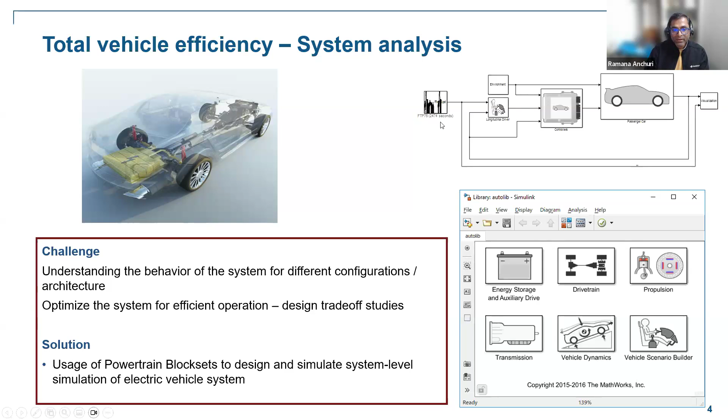To accomplish this, we need model-based design with Simulink. If you're already using Simulink, in some way you're practicing model-based design. For those unfamiliar, model-based design refers to expressing your models through a graphical approach where blocks mimic certain mathematical, logical, and physical behavior. Whatever action you perform on these models, they are ground truth and centric. Say you're designing something - you create these models, expressing executable specifications. The models enable you to specify these executable specifications, and you can test and verify these models, and also generate code from them and deploy to hardware.

Once the models are realized, they're centric to whatever task you do later. On the right hand side you see a simple DC motor built with Simscape Electrical, controlled by a PID controller with a set of references. Once the model is created, you can generate code from the PID controller block and target any microcontroller. So right from requirements to design to code to deployment, Simulink offers a platform to perform all these tasks.

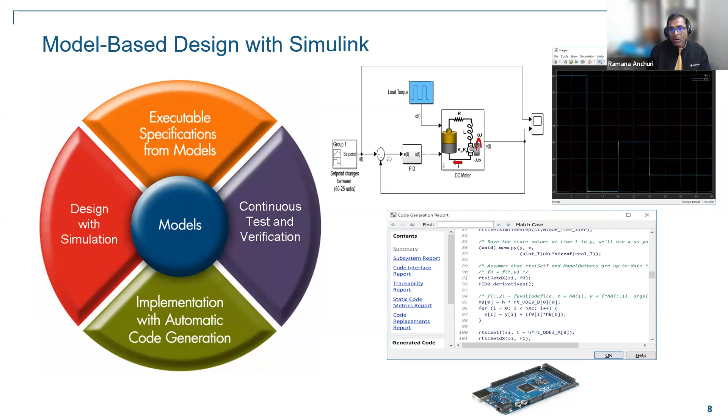Now, there are various ways in which you model these systems. Typically, they are divided into first principles and data driven, in a broad spectrum. In first principles modeling, it's all about the math behind these models and how you express this.

A little lower from first principles is physical networks. This is where you make use of a way that you do in your labs where you play with resistors, capacitors, and inductors. You can play with physical networks in a simulation environment, just like how you do with a breadboard and components.

The other aspect is data-driven modeling. Here we rely on data rather than the math behind the models. You can go with statistical methods, system identification, or neural networks.

Now, whatever modeling approach you want to take up, MATLAB provides various ways or workflows to do this. There are block sets and toolboxes that enable you to go with any of these modeling approaches.

One approach that fits in between first principles and data-driven modeling is the white box, gray box modeling, which is called parameter tuning. Here you can come up with math models or physical networks of your realistic model, and to parameterize the specifications in the blocks, you can perform data-driven modeling to tune those parameters in physical networks or math models.

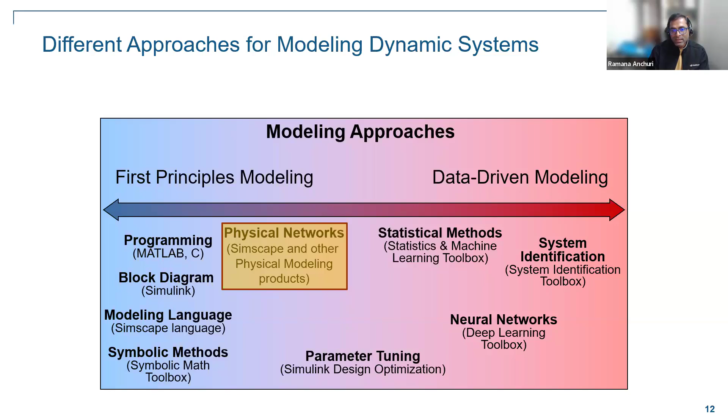Now, physical networks, on the background, do work on certain physics or equations, but you yourself need not express the behavior with mathematical equations. So what I mean is Simscape allows you to model physical networks.

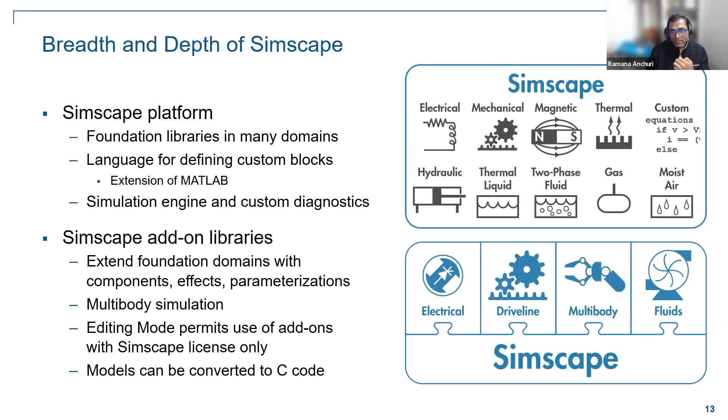For example, if you want to mimic the behavior of a resistor in Simscape Electrical, you can pick the library block resistor and then use it for simulation and analysis.

The other aspect is you can also perform nonlinear behavior. For example, in the previous mathematical modeling, when I asked, can you simulate the temperature effects? It becomes very hard. It's possible, but becomes very hard.

Using Simscape, you can perform multi-domain modeling. I can integrate the thermal behavior to an electrical system and then simulate both electrical behavior and thermal behavior of a system. Likewise, once you realize thermal, the next step is you want to look at cooling the system.

Now you can integrate the thermal liquid or two-phase fluid domain to the electrical and thermal models, and then do a behavioral analysis on when the heat is liberated. You can probably switch on a chiller, which will reduce the amount of temperature your system is generating. So in a way, it's sort of a multi-domain modeling environment, and you need not worry about the math behind this. That is already realized with these blocks, and you can quickly build multi-domain systems.

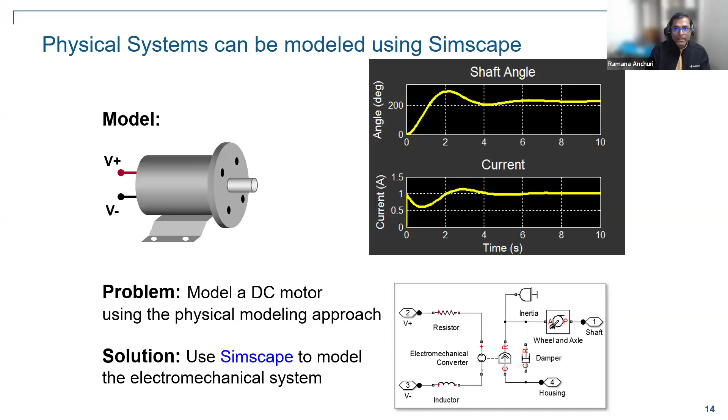So how is this different from mathematical modeling? When you write equations and then quickly hit run, you're actually solving ordinary differential equations. In this environment, you are solving differential algebraic equations. What does that mean? If you look at this loop, you can perform...

Kirchhoff's voltage law (KVL), and you can prove KVL physically in the simulation environment. So all physical laws hold good when you are using Simscape. If you are using a mathematical approach, then it's just equations, and you usually can't do that.

So what this means is when you are in this environment, you can consider current is actually flowing through these lines. In a way, this modeling construct exhibits a behavior that you see when you integrate components in the lab and power them. So you can bring that experience while you are modeling using Simscape.

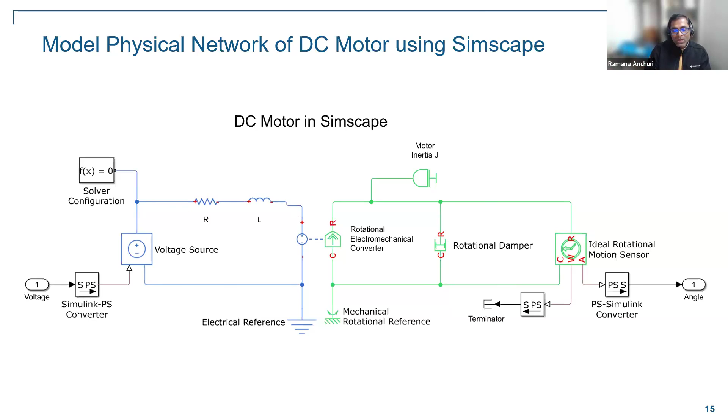Once you do the model of the motors, then it's all about how do you come up with a control mechanism. On that note, Simulink control design and control system toolbox will enable you to tune this PID controller pretty easily. You can start with a trial and error method and then see the response of the motor. But there is a quicker way where you can auto-tune the PID gains pretty easily with a single click of a button and realize the controller.

There are various ways to tune this. We will look at one of the most difficult methods to tune a PID controller for a non-linear plant. If your plant is linear, you double click the PID controller, click on hit tune, and it will give you the tuned gains just like that. But if the plant is non-linear, then we need to go through a data-driven modeling approach per plant and then apply the PID tuning to it. We'll look into that when we get to the power electronics converter tuning.

So let's look at the brushless DC motor. Previously, we have seen the simple DC motor, but this is a special purpose DC motor you can consider with permanent magnets. And you need to fire the windings of this particular converter appropriately by knowing the rotor position at every given point in time so that the action keeps going.

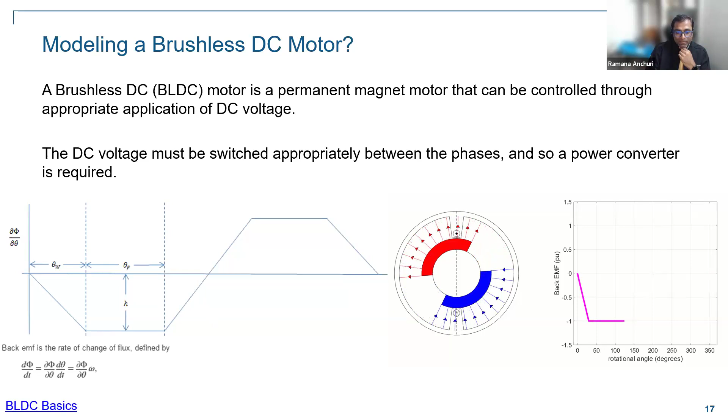So the thing with a BLDC motor is it always needs this front-end inverter. Why so? Because when you have a permanent magnet which is rotating, you need to fire these three-phase windings appropriately so that either attraction or repulsion happens and the motor keeps on rotating. But to do this, we should always know where the rotor is at a given point in time. So here, the power electronic converters are being switched so that you see three-phase currents getting into these windings, wherein the reaction happens and the motor rotates.

It's very important that the motor always has a front-end inverter, and you need to develop a logic so that these are fired. Now, when you're firing this power converter, you're not controlling the speed, you're only making the motor rotate. Nothing much you are doing. When it comes to speed control or torque control, then you have to employ control techniques on top of this behavior. So in a nutshell, if you want to make a BLDC motor rotate by giving power, you definitely need a front-end inverter.

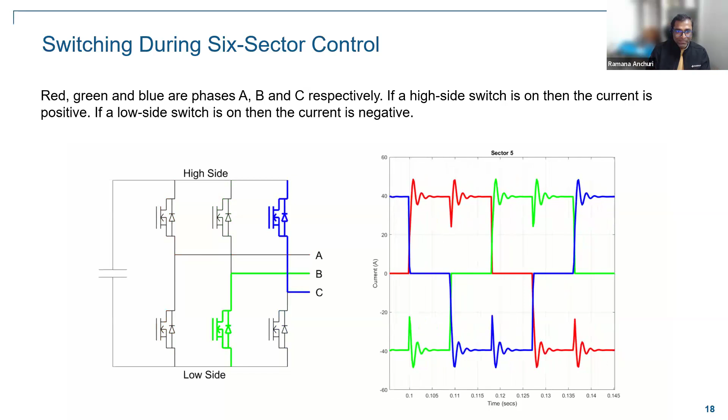So to perform speed control of a BLDC motor, again there are so many examples that we created. We highly recommend, if you're starting up with understanding these controls for BLDC, PMSM, or induction motors, that you have a look into basic examples around these motor controls. One such example is this.

As you could see, the blue colored blocks are electrical systems. I have a fixed DC voltage that I'm passing through an average buck converter, which enables me to get a variable DC at the DC bus here. This inverter is nothing but that front-end inverter I spoke of previously, which enables the commutation logic for this motor. So we have two controls here: one is this particular inverter making sure the motor rotates, and this buck converter is actually generating a variable DC so that the speed of the motor can be controlled.

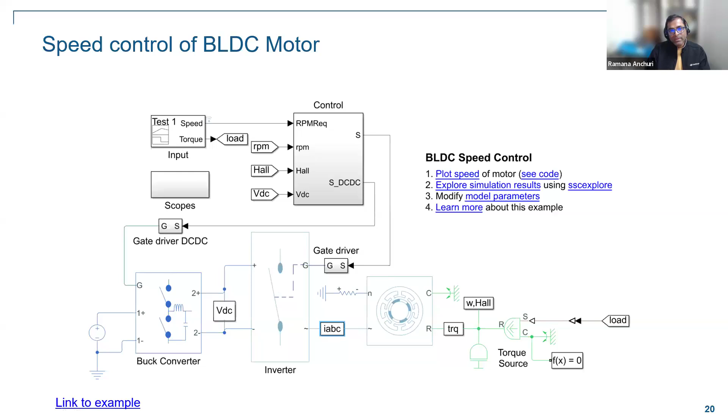Now if you look at the mechanical side of it, there is a mechanical reference connected to this, and we have defined the rotor inertia, and there is a sensor. There is a torque source wherein you can apply input to torque input, and that torque input is nothing but you loading the motor. So that loading torque is generated by this particular test signal. Here you're specifying the speed reference and also loading the motor. So all in all, this particular example will make you understand how to control speed of a BLDC motor, just the speed.

Now if you look at the control techniques, you don't just use voltage to control, because in scalar control you can't get better torque performance, and you can't precisely control the motor speed, etc. That's why you resort to the most popular control architecture, which is field-oriented control.

So in this case, this is a physical system wherein you have power supply, the converters, inverters, and the motor. You have the current loop, an inner current loop that works at a higher sample rate, and then there is the outer speed loop, which is a little slower compared to the current loop. So in this case our idea is to generate three-phase currents and enable this inverter working.

What's more important is you convert these three phases to Id and Iq, which are direct and quadrature axis currents. Each of these currents decouple the speed and the torque. That means you can use one reference current for controlling speed without affecting the torque, and one reference current you can control torque without affecting the motor speed.

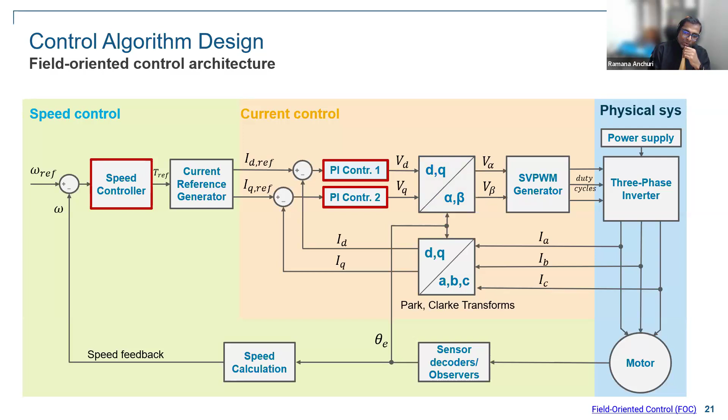So PI controllers are needed, yes, and you can also tune these gains of the PI controllers pretty easily through Simulink control design workflows. So all in all, irrespective of whatever the type of motor here, be it a BLDC, PMSM, or induction motor, this control architecture will work. The only thing you need to take extra caution with when using BLDC motors is the front-end inverter is needed to keep the action going.

So this is one case. This is a four-phase PMSM motor, and there are five-phase and three-phase PMSM motors also that you can use. But this example refers to the four-phase PMSM motor, and you have a converter, torque and load references, which you can define through a mat file or by just drawing through mouse.

And here you see the PMSM parameters. The one thing I often get asked is how can we parameterize this? How do I know LD, LQ, RS of my PMSM motor? One quickest way is the manufacturer of the motor will give you the data sheet, and the data sheet provides all these values. If not, there is a way to estimate the parameters of the motor by running a simple test on it.

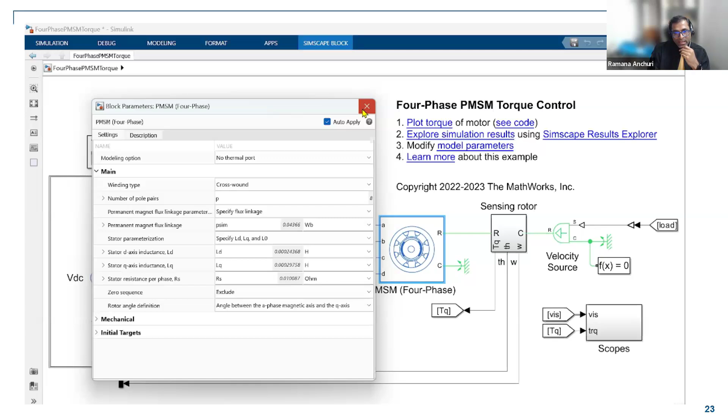If you are interested in parameter estimation, please look into certain examples where you can directly use Texas Instrument boards that are integrated to PMSM motors, and you can perform a quick estimate motor parameters exercise, which will give you all these values. Then, as I mentioned, we need to have a rotor sensor, and what you need to do is hit run, and the model compiles and gives you the results.

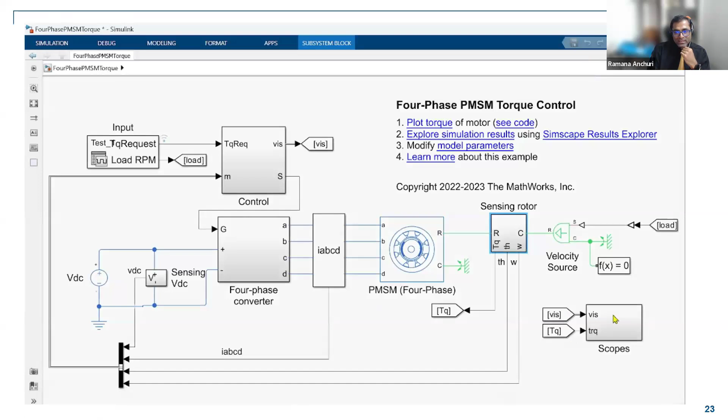If you look at the scope here, I am trying to see what is the speed of the motor and what's the torque reference and torque measured. Now, in the initial phase, I'm keeping the speed constant and varying the load. And if you see, my motor is able to generate the torque that I wanted, and the torque reference and the actual torque are the same.

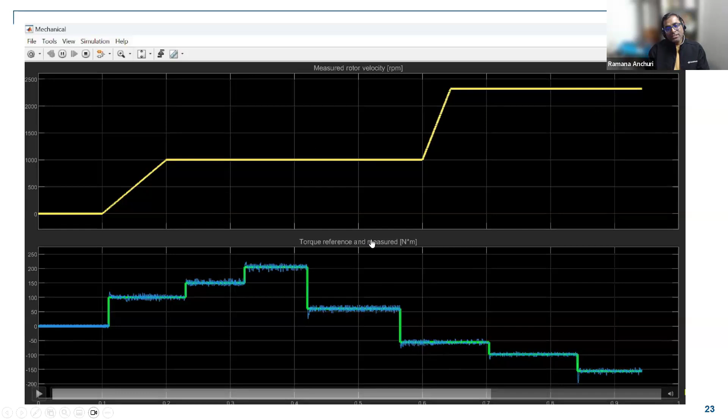Now, later in time, I'm varying the speed, and even at a different speed, when I change the load, it is able to follow the reference torque. So this proves the control technique is working fine. You are making these reference changes, but when the load is changing, you are able to maintain the constant speed at different speeds. So how is this done?

It is done through the C2000 microcontroller block set. We very recently released the C2000 microcontroller block set, where C2000 boards come from Texas Instruments, and you can design the motor control algorithms using Simulink, simulate the behavior, and then later implement this code onto the hardware with a single click of a button.

And you can deploy these models standalone and run the motors. Once it is deployed, you can just disconnect the motor USB port and run the motor standalone. It will not have anything to do with MATLAB and Simulink later.

So in this aspect, what we typically need to do is first calibrate the sensors, because sensors might have some noise, and initially we never know where the rotor position is. If needed, you can estimate motor parameters if you do not have an idea of what they are, or use data sheets if available. You can model motors and inverters, design the control algorithm, and then deploy. So the motor control block set will enable you to do all these steps from within the Simulink environment.

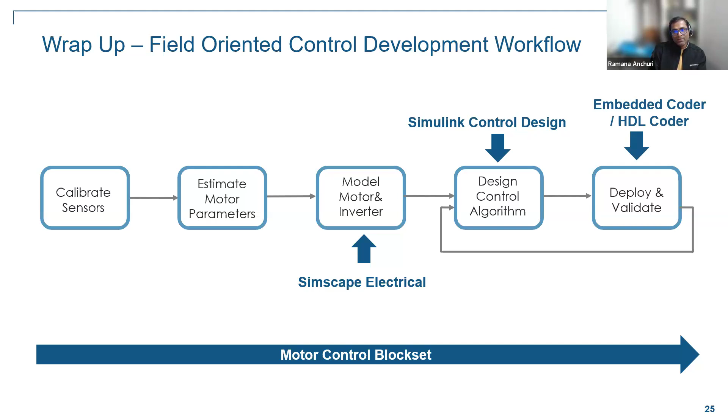So how does it work? Once you configure your model for hardware, as you could see, the hardware board here is TI Delfino F28379D. This is a very popular and latest board. We do see this launchpad in many universities too. The build, deploy, and start will enable you to generate code out of the model directly, C or C++ code, and it will invoke Code Composer Studio in the background, generate the bit file, and deploy it onto the hardware. It's just one click where you can translate this model to run on the hardware.

You need not struggle or put effort into understanding the code. Anything that you want to modify with respect to your algorithm, you can do it at a model level. The rest of the things are taken care of.

Not just Texas Instruments, but if you're targeting a different microcontroller like Microchip, NXP, STM, or Infineon, there are support packages for each of these hardware boards, which you can install for free and use Simulink to model the algorithm and deploy it onto the hardware.

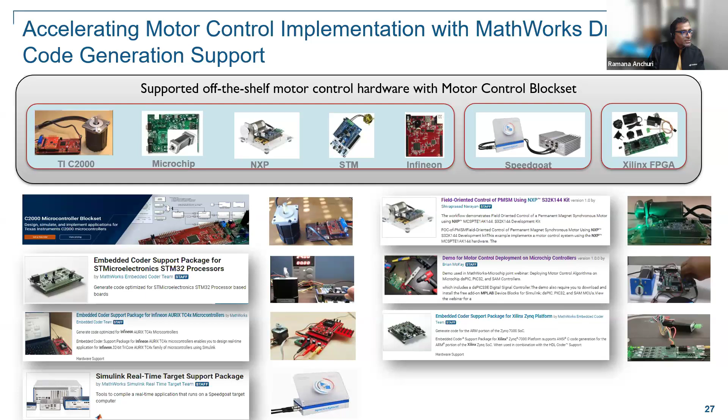So can you explain about the C2000 model? What is that? Can you repeat the question once again? So what is that C2000? Okay, so C2000 is nothing but a family of microcontrollers offered by Texas Instruments.

Texas Instruments is the semiconductor company that manufactures chips and launch pads, and these chips usually go into real world products. What you see on the top left, red color launch pad and a PMSM motor, the launch pad is F28379D, which is from the C2000 family of microcontrollers.

So we can save the code inside of this chip. Come again, sir? Can we save the code inside the chip? Yes, so previously I did mention here. Let me just go back.

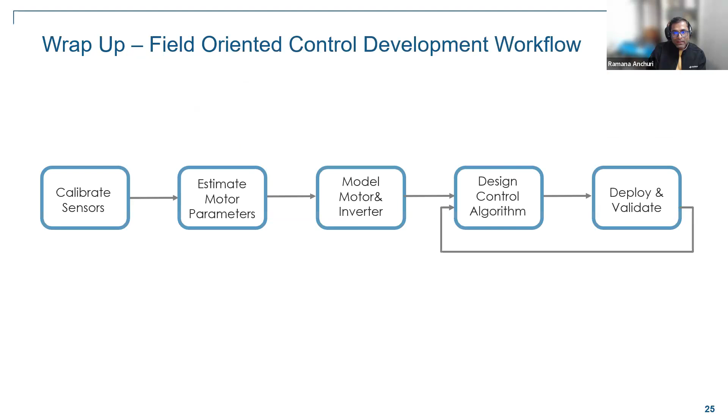Does it require any additional type of software installed for MATLAB? You need to install Code Composer Studio from Texas Instruments, they will provide you. Okay, thank you sir, it's a compiler. It's a compiler, and you need that.

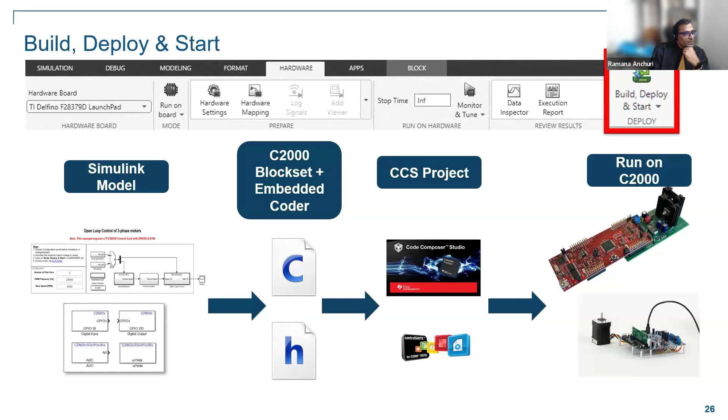Let's move to the power converter part. Power converters are basically needed because your load requirements could be different at different points in time, and sometimes your input is AC and you want DC, or your input is DC and you want AC, or your input is unregulated in case of solar panels, and you need a device that looks at the load requirements and then sends the power accordingly, be it in AC or DC form.

So what it needs is a sensor that always observes the power voltage and current going to the load, and then with respect to the user set references, you generate certain pulses and control this power converter. At times this converter could be pretty complex in nature, not just one switch, multiple switches, and you will have components like inductors, capacitors, resistors, etc. So why is this important?

If you look at some high-end cars, one use case, an automotive use case where there's a very high performance power converter needed, is this one. This is a Mercedes-Benz E-Class car.

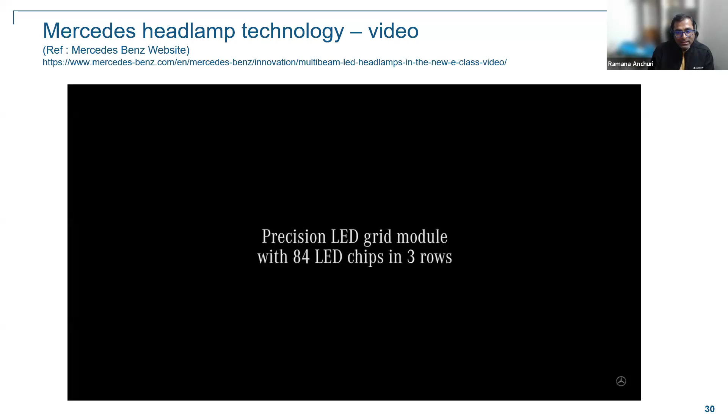So this particular one has an adaptive headlamp technology, wherein these LED strips are lit adaptively based on what the car camera is seeing. So what it means is the opposite vehicles will receive less glare, and at the same time you'll have better visibility of the road. You can also control which LEDs need to be lit so that the glare is minimum and your visibility is not lost. To perform something like this, we need a high performance power converter that can power these LEDs adaptively based on some sensor information.

So what it takes to build a technology like this - again, this is from Texas Instruments, called the Texas Instruments DC-DC LED kit. What it has here is an LED strip integrated through drivers, connected to a power converter. This is a DC-DC power converter, famously called SEPIC. On the right-hand side, the block diagram shows this is basically a single-ended primary inductor converter. This is the primary inductor at the source end, responsible for boosting the voltages.

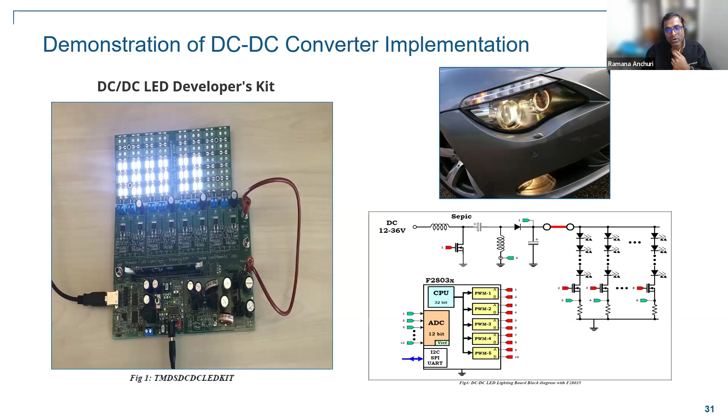Now, I did mention when introducing Simscape, you can consider this blue color lines as electrical connections. You can apply KCL at this node, and all the values you compute will conform to Kirchhoff's current law. That means whatever you are doing on the breadboard is equivalent to doing it on Simscape.

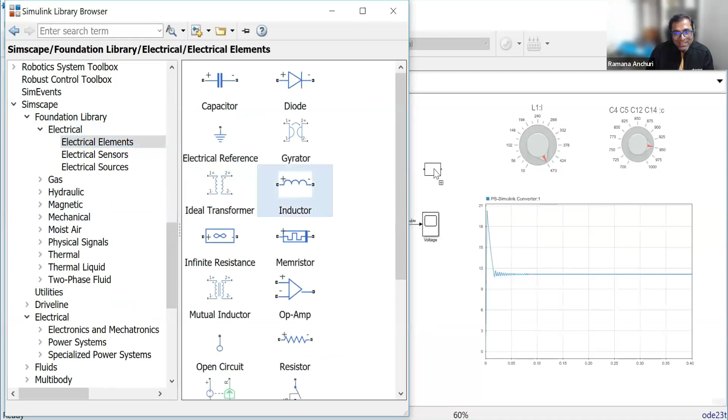So what Simulink offers is not just modeling, but you can execute this model and see the response. If you're wondering where I pick these models, you can use Simscape to model electrical systems - just go to Simscape electrical elements, drag and drop this onto the Simulink canvas, and double click to parameterize this block. The Simscape block itself gives you more information - it's not just inductance you specify, there's series resistance and parallel conductance.

What does this mean? You can model a realistic behavior of this inductance. And if a particular current is flowing and you want this inductor to behave like a saturated inductor, you can also change to that. So that means you can emulate the behavior pretty close to what you see in the lab.

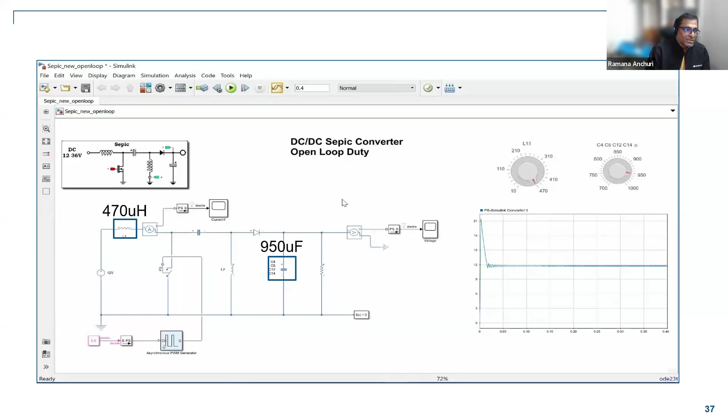Now here we'll look into the modeling constructs. What we have here is a 470 microhenry inductor, and the load capacitance is 950 microfarad. These two basically impact this converter pretty much. If you go wrong in picking the right value, whatever is happening on the source end will go wrong too. These values are from the datasheet, but typically when developing your own converter, you never know what value of inductor and capacitor to pick. So we'll look into how we can optimize the values of capacitors and inductors of a power converter.

But right now I just have a 50% duty cycle. I just used the datasheet parameters and was able to simulate the model. Here, LEDs are replaced by a resistor. In the previous case, you got some overshoot initially, but the voltage stabilized without much ripple. This is the response I got directly using the datasheet parameters.

Typically, if you're designing your own converter, you never know the values, and trial and error methods will be very effort intensive. You can't do that with physical capacitors and inductors. So one way of doing that is through simulations. Here, instead of using datasheet parameters, let's change the inductance to 10 microhenry instead of 470, and do the simulation.

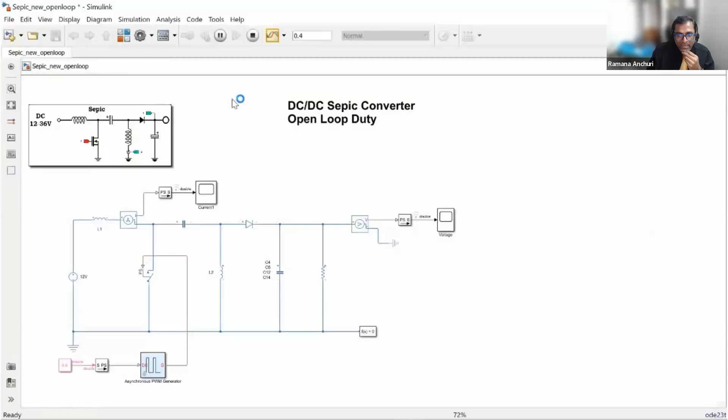Now when you do this, I am not receiving any ripple in the output voltage, which is good. But if you look at the input current and zoom in on it, the behavior is not what I'd like to see. Ideally I need a continuous current, but this current is going below zero and negative for a certain amount of time. That means this converter is operating in discontinuous conduction mode. We usually teach students these aspects: continuous conduction mode and discontinuous conduction mode.

Changing simulation parameters, you can explain these phenomena pretty easily using SimScape. Now, the problem with discontinuous conduction mode is if it's LEDs, they might flicker. If you're using this converter to run a motor, there will be torque ripple and noise generated. You're also polluting the input side, so the power factor will reduce, and you end up using more current for a particular performance. So this is not desirable. Although the output voltage is ripple free, the input current became discontinuous.

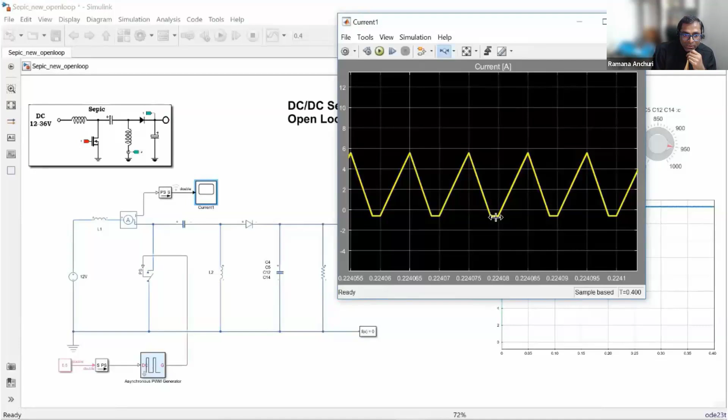So picking the right values for inductors and capacitors is crucial. Simulations will enable you to do that analysis very quickly and arrive at optimal values. We used simulations to design the parameter values for these components, giving you a scope to optimize component sizing through the analysis. Typically, people end up designing their own inductors and rely on capacitors available in the market. Through simulations, your effort reduces because you can easily compute what value of inductance will be sufficient. More inductance can be used, but your PCB becomes bulky because you end up having more turns, more weight for the inductor, more space, and so on. So you can optimize component sizing using simulations.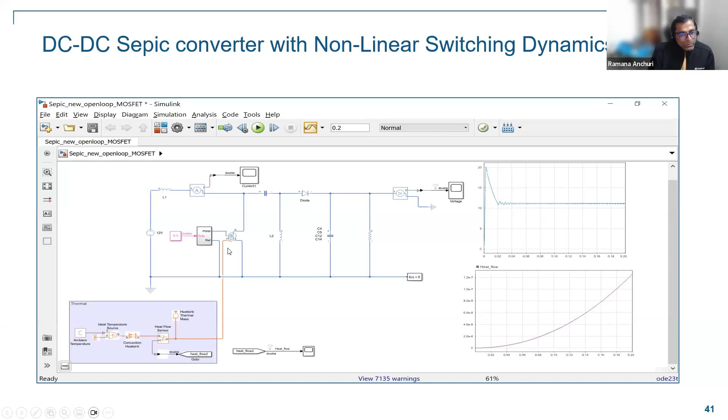The next part is nonlinear switching behavior, which is also very crucial. In the previous case, I used an ideal switch, but in the real world, no switch is ideal. So I replaced the ideal switch with a MOSFET here in this converter, and you do see some differences here.

On the switch itself, one of the inputs is the PWM pulses, and you have the drain and source connected to the electrical wire. But there's also this orange, or rather gold color lines, which are for modeling the thermal behavior of the power electronic switch.

Why this is important is we often tend to go at high switching frequencies because you can easily filter out high frequency ripple. But the problem in doing so is the switch generates a lot of heat, and this heat needs to be regulated through heat sinks or forced cooling, etc. Now, to determine the cooling requirement, you need to model that thermal behavior here, and that's what we did. You can right click on any power electronic switch.

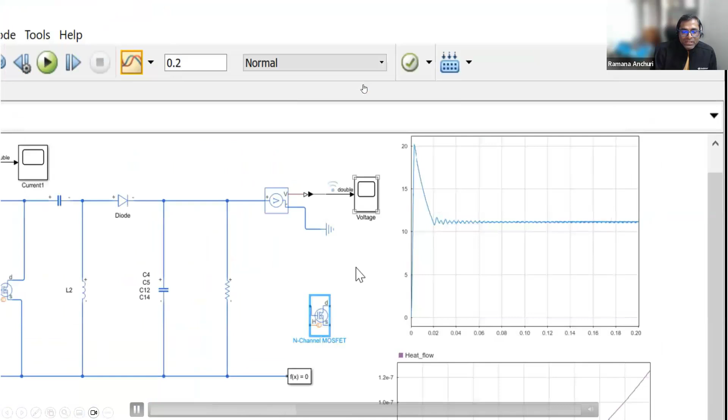And then in Simscape block choices, you can select threshold based thermal. Now you see a thermal port, which is H, that is appearing. Using Simscape thermal, you can build the thermal behavior of this.

Okay, so I'll spend some time on this to make you understand. When the switch is operating at a certain switching frequency, it generates certain heat, and that heat information is available at this port.

Typically, as a user, you will express at what temperature your power converter is operating, which is nothing but the ambient temperature. Heat flows from a point which has more temperature to a point which has less temperature. If this switch is generating more heat, then the heat goes from node H to the ambient through a medium.

Now, when the heat flow is happening towards the ambient, there will be some loss of heat while the flow is happening. That is modeled by a thermal mass heat sink. This exhibits a behavior where it sucks out some heat that is going from this H port to the ambient, just like how voltage drops when it goes through a resistance. The heat is lost through this thermal mass, and we have a sensor that measures the heat flow.

And how this heat escapes to the ambient is the convection heat transfer. So we do teach students about this heat sink design where the junction temperature is at high temperatures, and then it goes from case to heat sink to ambient. Now you can model that entire behavior using Simscape thermal.

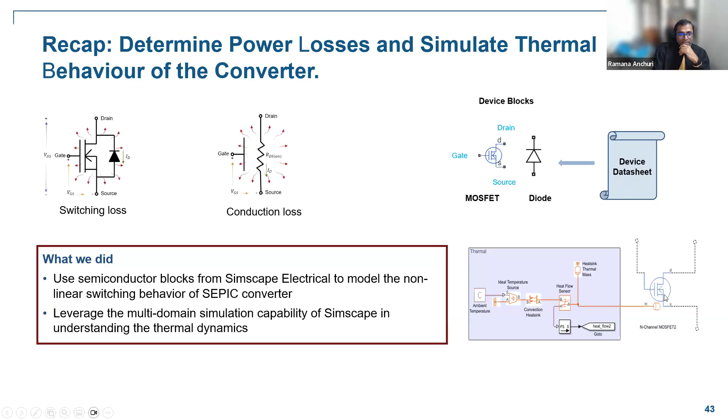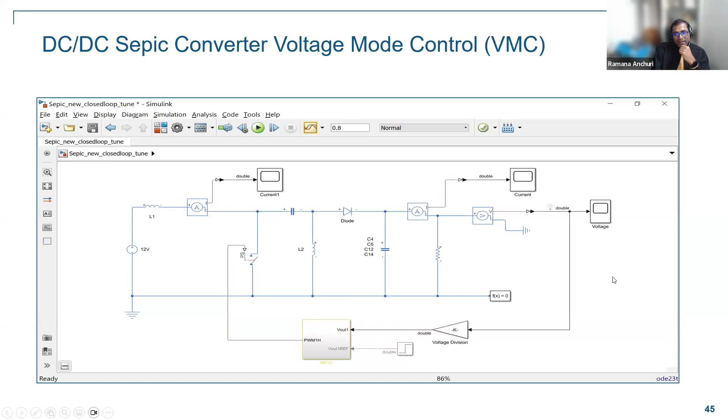And typically this is the block where we can generate code and deploy it onto hardware, and that software will control the actual power converter. So what you can do is set the references first. Here I'm setting it below 0.4 seconds.

I want the output voltage of the converter to be 12 volts, and after 0.4 seconds it needs to be 27 volts. That is the reference set by the user. Once this is set, then you can run the simulation.

Here I did not tune the PI controller at all, it's just blank, default values. But now below 0.4 seconds it needs to be 12 volts, and after 0.4 seconds it should be 27 volt. That means this controller is not working at all.

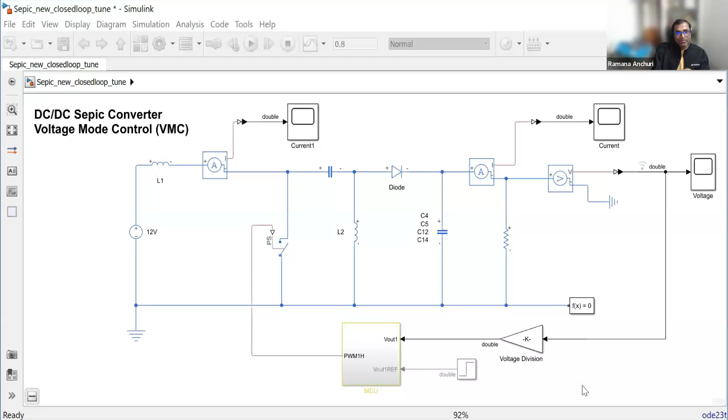Now what we need is to design the controller gains properly so that the reference and actual are the same. To do that, we can go to the PI controller block, double click on it, and then hit the tune button. By default, the proportional gain and integral gain are 1 and 1.

When you hit tune, what happens in the background is it tries to linearize the plant. I did mention at the DC motor end, if your plant is a linear plant, the PID controller block will directly give you the gains. But if it is a non-linear plant, then you need to go through a different methodology to tune the PI controller. So the flag it shows is plant cannot be linearized, and it asks us to identify a new plant using data-driven methodology.

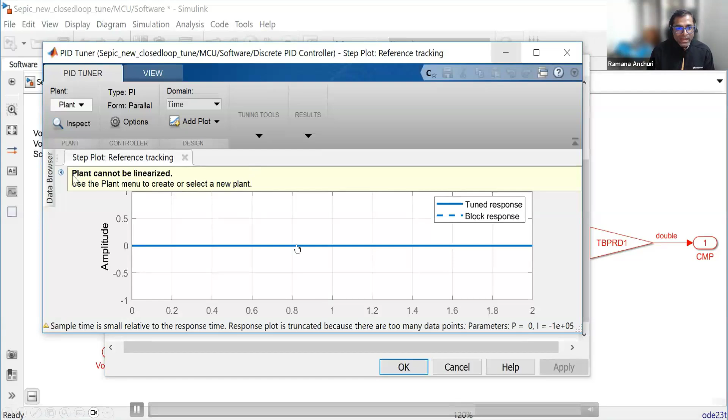So I am going to walk you through a process on how to rely on data-driven modeling to auto-tune the PI controller. To do that, you need to go to plant, and then click on identify new plant.

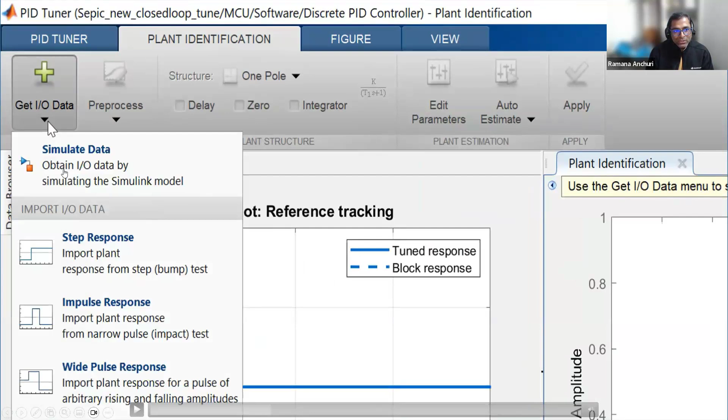On the right hand side, you do see a new tab appearing, which is plant identification, and it is asking us to use the get IO data menu to identify the new model. So you need to go to get IO data and click on simulate data. You can set the offsets. I will let you know what these offsets and amplitudes mean.

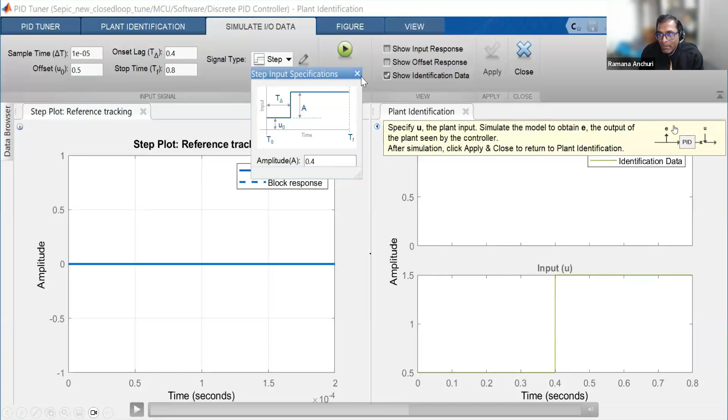That means we are not using the PID controller at all. Instead, we disconnected it and we are just sending a step input as U and then computing the error, which is nothing but this particular graphic.

Here I am doing 50% duty cycle to 90% duty cycle, that means this U is nothing but the step input. With respect to this step input, I am computing the error, which is going as input to the PID controller. In this process, please make a note, PID controller is not doing anything. We disconnected it. We are just sending a duty cycle, which is nothing but this step input, and we are computing what is the error. So here in this case, we are using U as an input, E as an output.

That means using this input and output data, I can identify a new plant model using a data-driven approach. That is what is happening. Instead of using the same plant model which is on Simscape, I am relying on data generated by the Simscape model. Here in this case, step input is the input and output is the error that otherwise will go through the PID controller.

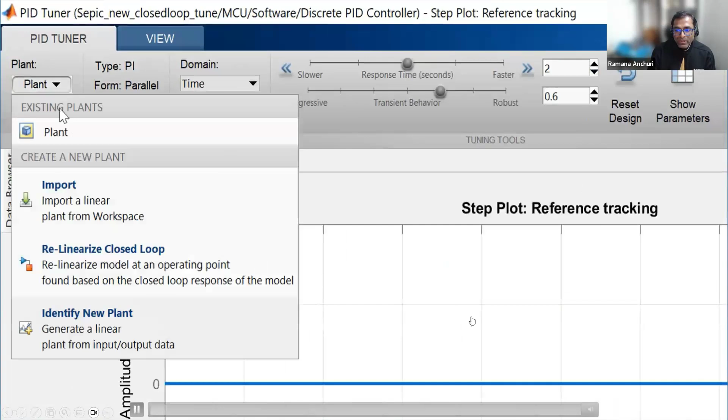Once you do this, you can apply and then close. Now here...

As the label indicates here, my identification data, that means the response of the data-driven model, is the green color response. The plant I identified using the data is the blue color response. Now, definitely there is so much gap between what I identified and what the data is providing me. So you can use this adjuster and then reduce the gap. The other thing I can see here is the transient response of the model is not being captured properly.

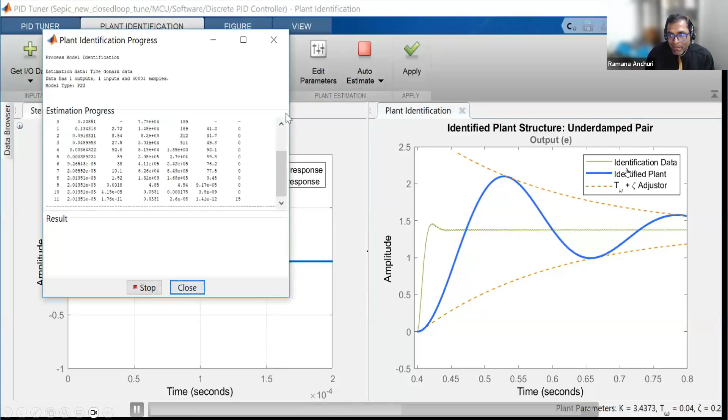That is because the structure used to identify a plant model is only one pole. If you give more flexibility to the plant model, here we are applying an underdamped pair of poles so I can place these poles properly to map the identified plant to the identification data. But when I changed the underdamped pair of poles, I did not place them properly so that the response is in line with the identification data. In that case, I can resort to clicking auto estimate. When I click auto estimate, it will place the poles properly at certain locations and map the identified plant to the identification data.

Now you see my identification data and the identified plant are correctly mapped. What this means is you generated data from a Simulink model and created a plant that exactly behaves like what you generated with the model. Now I use this identified plant instead of the Simulink model to tune the gains of the PID controller. So instead of directly working on the nonlinear plant, which is the power converter, I am generating data from the power converter and using that data to identify a new plant transfer function.

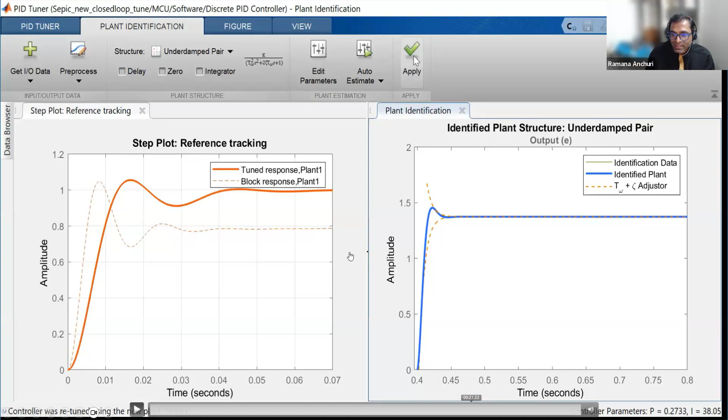Once you do that, you click on apply. Now this plant is used to tune the controller. Now you get the response of the PID controller. You can also see at the bottom the proportional gain is 0.2733 and integral gain is 38.05. Now, once this is done, you can see what parameters the block previously had, which is 1 and 1, and what parameters it has after tuning. You can also see all the performance and robustness parameters like rise time, settling time, overshoot, gain margin, phase margin, etc. This gives you more confidence about whether your system is closed loop stable.

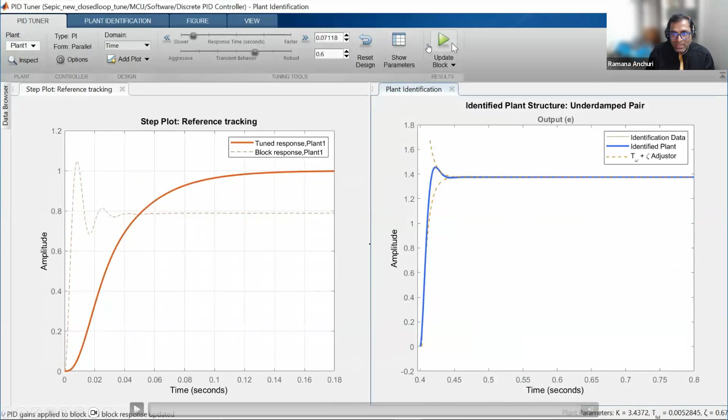Once these gains are computed, you can use these sliders to make the response faster or slower, more aggressive or more robust. Once that's done, click on update block. The values you saw in the previous process will get updated on the block parameter. Once this is done, you can click OK and run the model.

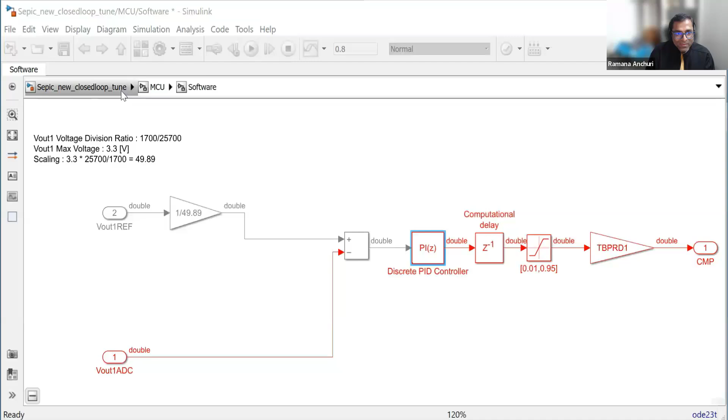Now you see the response of the system. If you remember, I set the reference as 12 volts before 0.4 seconds and 27 volts after 0.4 seconds. Now I can see the output voltage of the converter is actually following the reference voltage. So this is how you can tune control algorithms for nonlinear plants.

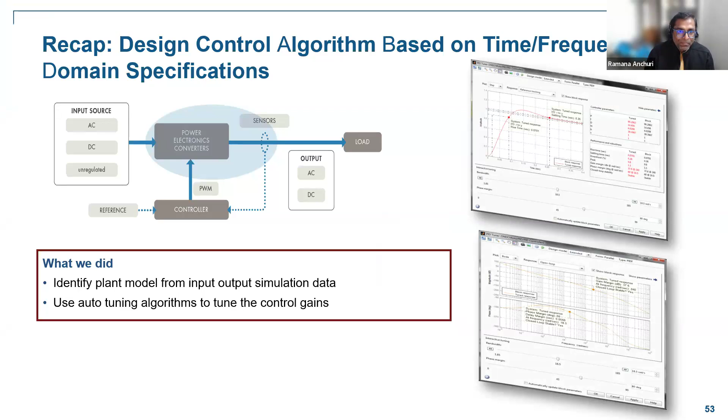So you can use this analysis, simulate input and output data, and then auto tune the control algorithm. Now the next and final part is how do you deploy this algorithm onto hardware? Because we can't just stop with simulations.

What MATLAB Simulink offers you is the ability to translate the control algorithm to either C or C++ if you are targeting microcontrollers or DSPs, or VHDL or Verilog code if you are targeting FPGAs or application-specific integrated circuits. Whatever it is, the model is the same, and you can generate code to target any of these boards.

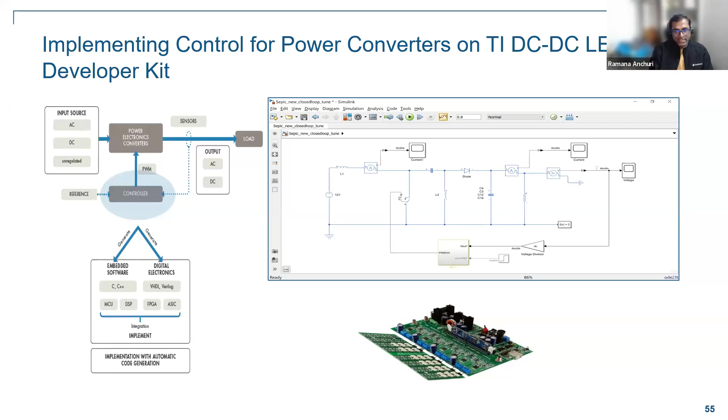Right now our target is the Texas Instruments DC-DC LED kit. You can take the microcontroller subsystem itself and have the interfaces ADC and PWM. These will come from the microcontroller block set, the C2000 block set, and these interfaces will enable you to communicate with the hardware from within Simulink. You need not write any device drivers for Simulink to communicate with the hardware.

Once this is done, one interesting way of verifying whether this control algorithm is working on the hardware is to run the simulations in external mode. What this means is, I have a PI controller subsystem here, and with all the interfaces that are needed, I can run the simulation from within Simulink and also deploy the code on the hardware, and read back the signals into simulation to verify, based on my references, whether the output voltages are changing and whether the particular LED strip is lit or not. All that analysis and verification can be done from within the Simulink environment itself. So here Simulink is communicating with the board, and we are reading back the values that are written on the board. This is what we call external mode simulation, and you can run it in tandem.

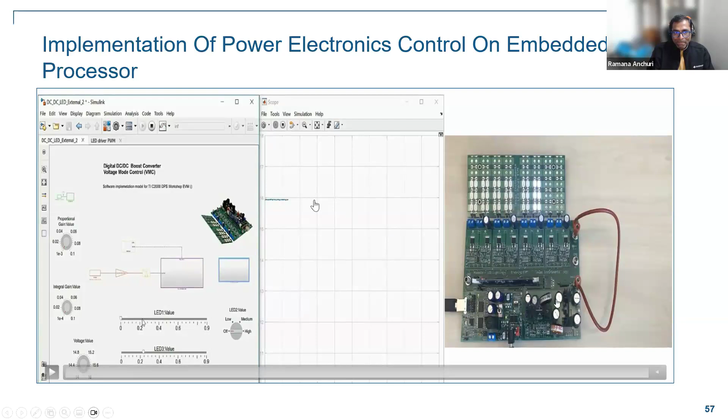In a nutshell, it's not just tuning the controllers — you can generate C or C++ code and deploy it onto the hardware. There are various ways to verify the code as well as the algorithm, and later you can generate optimized code. This is production quality code — please don't mistake it for Gen AI generated code. This is production quality code that can go into real world applications.

That's it from my end for today. I am open for any questions you might have.

One question — why did you give the 0.4 value to U for the plant model to convert it to linear? You converted the nonlinear plant into a linear one for tuning the PID, and gave an amplitude value of 0.4. Why 0.4?

So the thing is, we changed the duty cycle of that particular system to generate the error. I needed to generate data so that when the duty cycle changes, we see what happens to the output voltage. So I set an offset of 0.5, and then used an amplitude of 0.4. What happens is the duty cycle starts at 50%, since the offset is 0.5, and then 0.5 plus 0.4 becomes 0.9. That means I'm changing the duty cycle from 50% to 90% while capturing data to identify a new plant model. So I just set the offset and amplitude while doing that.

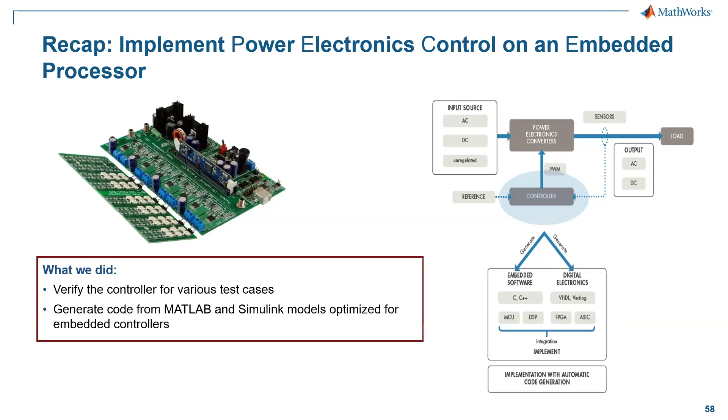Any other questions from the participants, please? I think there is no other query, sir. So thank you very much, sir, for delivering such an insightful and enriching session, and for taking valuable time out of your busy schedule. No problem at all.

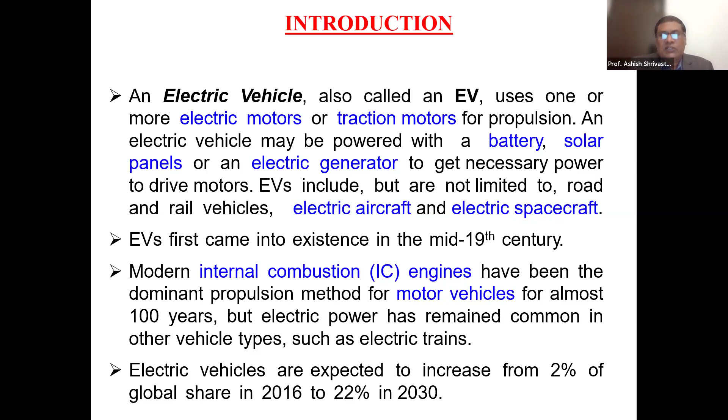Electric vehicle, as per our Honorable Minister of Transport, Mr. Nitin Gadkari, he has set a target for the Indian context that almost 30% of vehicles on road would be electric vehicles. That is the target which has been set, but we are somewhere close to 5% only. So we are way behind the target which has been set. I am telling you the current scenario, which is close to 3 to 4% in the market as of now.

What are electric vehicles? It is known as the green vehicle because it does not give any pollution to the environment. It does not have any internal combustion engine.

All the power provided in the electric vehicle is through the motor, and then through the gear system the power has been generated. The motor has to play the key role, and along with the motor, there is a lot of power electronics also involved.

You need a DC-DC converter because charging has to be done for the battery, which needs DC supply. But the charging gun you plug into the socket is AC powered, so AC power has to be converted into DC. So then we need an AC to DC converter, and then we need a DC to DC converter.

Why do we need a DC to DC converter? Because every charger works on two modes: CC mode and CV mode, that is constant current and constant voltage. Initially it should go into constant current, so the battery should be charged for the initial 70% on constant current. Then it has to switch from constant current to constant voltage, and the battery management system plays an important role while shifting between the two.

So that's why the DC-DC converter plays an important role. A constant current driver has to be made so that constant current is supplied, with the basic purpose of achieving fast charging. Reason being, batteries are rated in ampere hours. More ampere you give, the faster you can charge. So the ampere hour requirement has to be fulfilled.

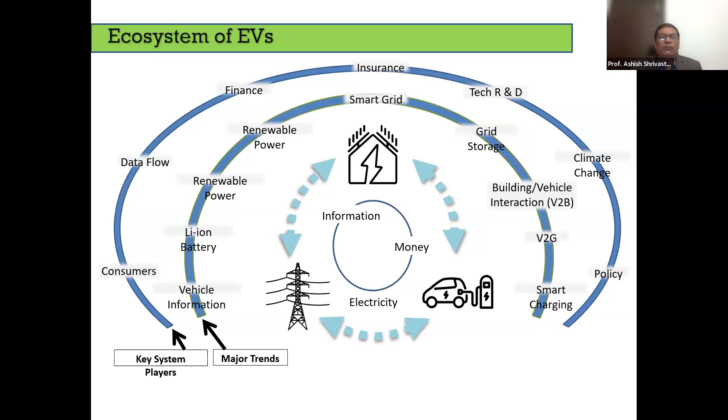Similarly, the government is making policy so that at late night, rates will be low, so that most people can conveniently come at night time for charging their vehicle at commercial charging infrastructure. So this is the overall ecosystem where a lot of data, money, and concepts will be flowing from one part to another.

Looking at the history of electric vehicles, in the 19th century, in 1837, the first electric car was invented in Aberdeen, Scotland, by Robert Davidson. Later, in 1841, he built a larger electric train car. Then 40 years later, around 1884, inventor Thomas Parker created the first electric automobile in London.

Then in 1890, almost 50 years later, the first electric car was produced in Iowa, USA by William Morrison. The car was considered an electrified wagon, which could carry up to 6 passengers, but with a maximum speed of 14 miles per hour.

So that means somewhere around the 19th century, this idea was explored but could not survive because the design, the battery, the motor, they were not able to really fulfill the requirement that the IC engine could. That's why for almost 100 years the IC engine has had a monopoly in the automobile industry. But now electric vehicles are coming forward.

Similarly for electric vehicles, the batteries also have their own history of inventions. First, the non-chargeable battery was developed in 1830, which was purely the lead acid battery. Then the chargeable battery came after that, in 1859. Then the deployment of electric powered trams, these batteries were deployed in 1890. And then in 1990, the lithium ion battery came, which has revolutionized research in electric vehicles, because 50% of the cost of the vehicle is basically the battery itself.

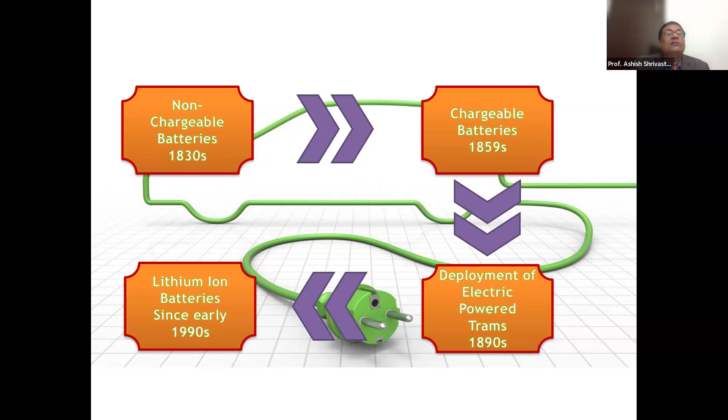Secondly, during the rainy season, you might have seen in many parts of India the underpass areas are fully waterlogged - Gurgaon's story everyone knows. In the rainy season, there's more than 2 feet, 3 feet of waterlogging on the road itself. With electric vehicles, people are skeptical whether they can go through an underpass that is completely waterlogged or not. If any drop of water enters the battery terminals, although they are quite well designed and well packed, if water droplets reach the positive and negative terminals of the battery, they will simply short circuit it, and then you cannot move even 1 inch further. That is what makes people really skeptical about whether they should purchase an electric vehicle or not.

Nitrogen dioxide, NOx emissions - 41% of NOx emissions in Delhi were due to vehicles in 2020. It must have increased over the past 5 years. Then 23% of PM 2.5 emissions in Delhi were due to vehicles in 2020. So now this number is increasing.

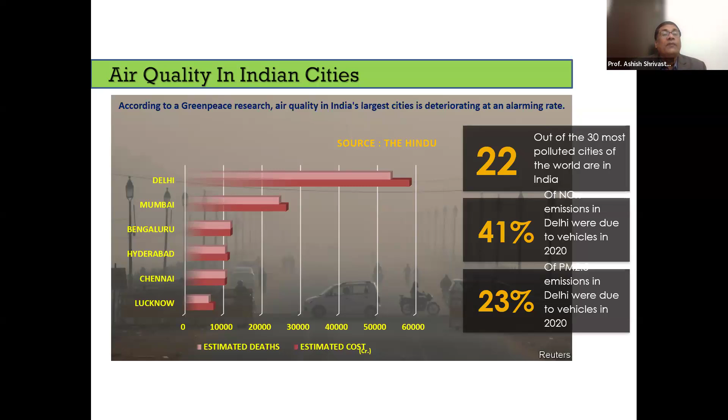So that means looking at this scenario where the air quality index is really alarming and increasing, we need to really think about this movement from gasoline vehicles to electric vehicles. This is the carbon emission we are talking about as far as technology advancement is concerned. If you use an advanced internal combustion engine, meaning a newly designed IC engine vehicle, you can reduce carbon emission up to 15%. If you use natural gas or biofuel, you can reduce it up to 30%.

If you use a hybrid vehicle, where fuel is also there along with an electric motor, it would be designed such that at certain speeds the motor will be operating your electric vehicle, and at certain speeds it is the fuel which is giving power to your vehicle. So in that case, you can have a saving up to 40%.

But if you are using a fully 100% electric vehicle, or a hydrogen vehicle - our Mr. Nitin Gadkari comes to parliament using a hydrogen vehicle - these hydrogen and fully electric vehicles have the capacity to fully reduce your carbon emission, carbon footprint, by around 50 to 100%. That is the task, what we should expect, that we should really reduce the carbon footprint with these vehicle uses. And you can see, every home these days has a minimum of 2 or 3 vehicles already. So this is the scenario.

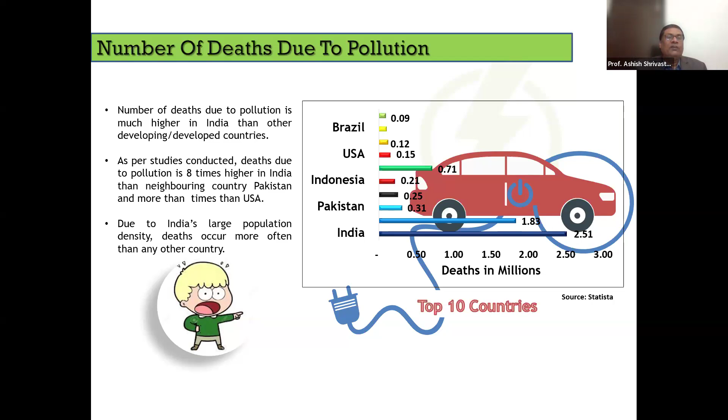Now this is what I was talking about: number of deaths due to pollution. If you see, the number of deaths due to pollution is much higher in India than any other developing or developed country. In comparison, we are at 2.51 million deaths - that's a huge number. If you see the comparison of 10 countries' data, we are much ahead as compared to any other country. As per studies conducted, deaths due to pollution in India are 8 times higher than in neighboring Pakistan, and more than 20 times higher than in the USA. This is again alarming - deaths due to accidents are not as many as due to pollution, and due to the larger population density, deaths occur more often here than in any other country. So again, population is one of the major reasons for this higher number of deaths due to pollution.

So why should we move towards EVs? Well, there are many reasons which we have already gone through.

First is reliability and flexibility - that means it has less maintenance. Electric vehicles have less running cost, though they have a higher initial cost as of today. But with more intervention of policies by the government of India, the cost can reduce to an affordable price, and more production of vehicles will also reduce the cost.

It was exactly the similar situation whenever a new invention comes - like you can see the example of the LED bulb. Earlier incandescent bulb, then CFL, then fluorescent tube, and now the LED bulb. Automatically, the initial cost of the LED bulb was quite high, but now with larger production, larger user base, and larger policies of the government of India, the cost has come down to an affordable price.

And also the running cost is pretty much lower compared to other sources of light. Similarly, the running cost of an electric vehicle comes around 1.5 to 2 rupees, in comparison to around 8 to 10 rupees for a petrol vehicle, and 6 to 7 rupees for a diesel vehicle. So that means running cost is the major saving.

Affordability - yes, currently this is a challenge because the cost of electric cars is really high. But with new models coming out, the government has to come forward to provide more relaxation in policies to encourage the purchase of electric cars. Although they have certain policies, they are not enough to promote more purchase of electric vehicles on road.

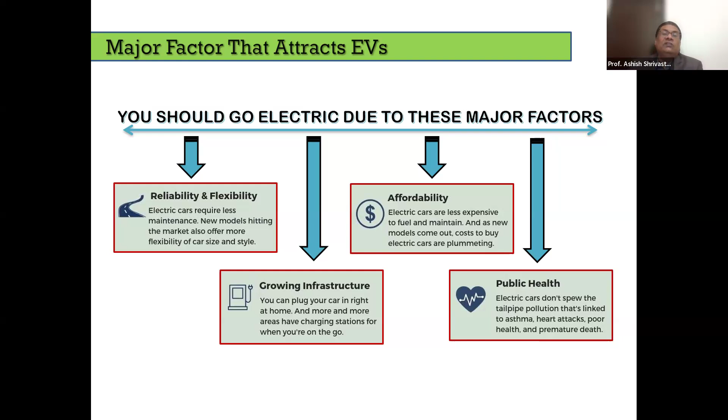Then growing infrastructure - yes, we need to see the requirement that we develop more and more power supply, more ways to tap renewable energy, so we need to build more charging infrastructure. The same setup as petrol or diesel pumps can be utilized, where you put solar panels. If it's a coastal area, you can put windmills and tap that energy. So these are the major factors which attract EVs to be utilized in the market.

Now, coming to the first question I showed in the first slide: what is the saving to India on oil import if all fossil fuel vehicles are converted into electric vehicles by 2030? You will be really shocked to see the number. If we are successful in doing so, shifting to electric vehicle, we can save around $300 billion, equivalent to Indian rupees 20 lakh crore, in oil import. That much saving we'll achieve if 100% of vehicles on the road by 2030 are electric vehicles.

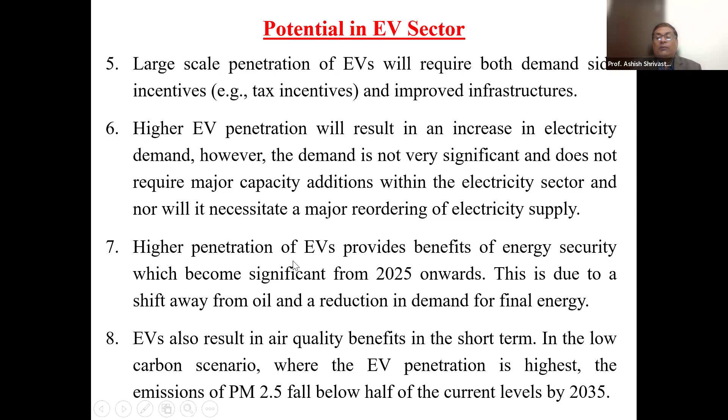EVs also offer the opportunity to act as distributed storage in urban energy systems, which can help in better integration of intermittent renewables like wind, because wind and solar are not available round the clock. If you use a battery energy storage system, you can store the energy and utilize it at night.

There are many areas where the grid is not available, especially in the northeast. They are using this nano grid or micro grid concept, where whichever source of energy provides power in the daytime, they store it and utilize it at night. With awareness, one has to utilize this concept, and your batteries can really serve this purpose.

The role of national government is also significant in setting standards and regulations for charging infrastructure. The government has to come forward with more and more charging infrastructure, meaning more jobs, more incentives for vehicles, more investment in the grid and battery charging infrastructure, which will certainly give more options for jobs, research, and infrastructure development for the end user.

The government can support research on innovative models for batteries. As I said, a lot of research is going on in battery, vehicle technology, and motor technology also, improving the availability of charge.

You can recycle, reuse, or swap batteries, a concept already being used outside India as on date. This means a charged battery is already there with the vendor. Once you reach the vendor, he will replace the battery, giving you two batteries, one charging at the workshop. So whenever needed, you need not recharge, you just go to the workshop, they replace the battery, and within 5 minutes you can again move towards your destination.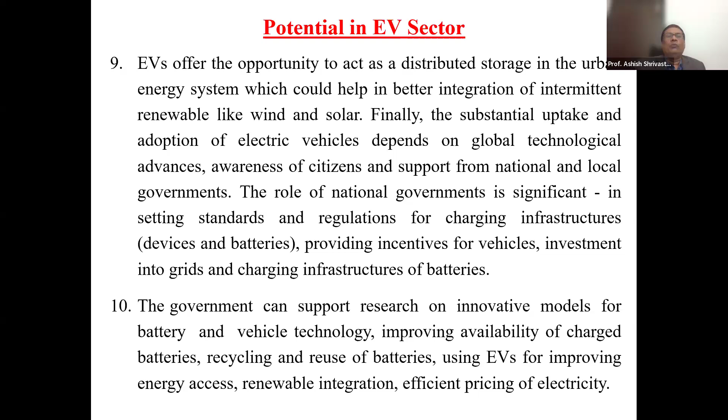Now the next most important question, looking at it as a power electronics or motor engineer or electrical or electronic engineer, is what is the best motor technology used for EV. There are 5 motors currently being used. The first is the PMBLDC motor, permanent magnet brushless DC motor, which is very compact, cost effective, and very efficient.

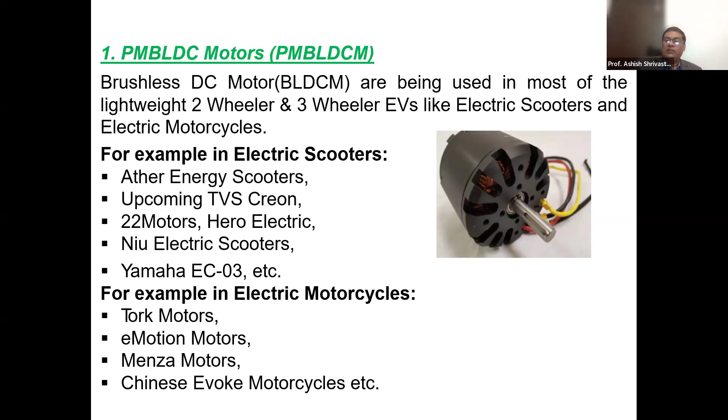Now the question is, why are PMBLDC motors used in EVs? First, in comparison to the other 2-3 motors, PMBLDC motors are very efficient. You can get more than 90% efficiency, and these days they have designed motors with more than 95% efficiency as well.

They are lighter in weight, compact in size, and simpler to control the speed. Even the reverse function can be easily controlled compared to a three-phase induction motor, because in a three-phase induction motor you have to change 2 phases. Here it is much easier to achieve. That's why they have gained popularity, especially in two-wheelers and three-wheelers.

Now the other change is that for China, it has become easy to produce PMBLDC motors in huge numbers. Why so? Because in PMBLDC motor, the first 2 letters, PM, stand for permanent magnet, and China has been gifted with rare earth material as an ore available in their earth's crust, which can generate those high-powerful magnets. That's why more than 90-95% of these PMBLDC motors have been imported by other countries from China. China's economy is growing because of this invention and because of the God-given rare earth material available for development of the permanent magnet.

They are producing low, medium, and high power PMBLDC motors for EVs in huge numbers and supplying all over the world. That's why they are gaining momentum in developing their economy at a much faster rate. Motors like PMSM and PM synchronous reluctance motor are much better in efficiency, with no torque ripple and less noise. But they are more expensive to manufacture, and also not available in larger power ratings by different manufacturers. That's why they are not being utilized in two-wheelers and three-wheelers as of now.

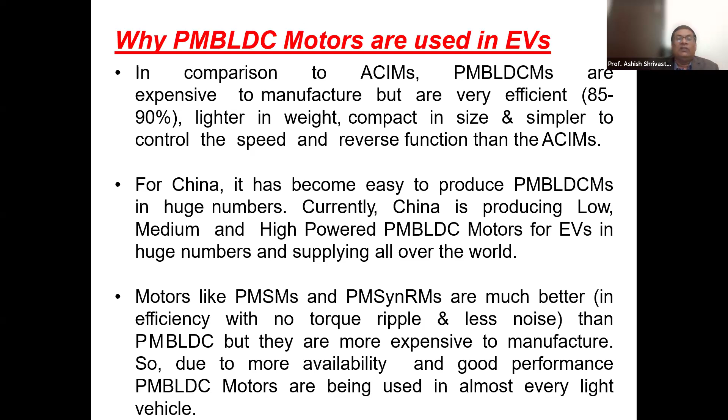Because they have developed a monopoly. The actual cost within the China market is 800, but it is 2,400 in other markets. That means they are charging almost 3 times more than their existing market price. Why? Because within their country, they control everything, making it much cheaper since it's in-house, while outside they make different power ratings and charge more, simply because they have a monopoly. So for the Chinese market, for Chinese people, it is much more cost effective. That's why they have fully electrified their two-wheelers, three-wheelers, and public transport.

The other alternatives, as I said, are PMSM, three-phase induction motor, and permanent magnet switched reluctance motor. Synchronous reluctance, as I said, is not being used. It is still only in the research paper stage.

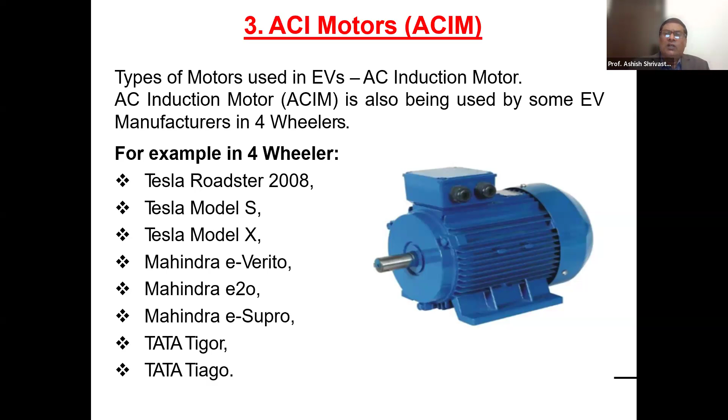The three-phase induction motor has been around for so long and has very good speed control as well. It has been used by most Tesla motors - Tesla Roadster four-wheeler, Tesla Model S, Tesla Model X, Mahindra E2O, which was the first electric vehicle by an Indian manufacturer. Mahindra E Verito, Mahindra E Supro, Tata Tigor, Tata Tiago - even Tata Nexon - all use this same three-phase induction motor.

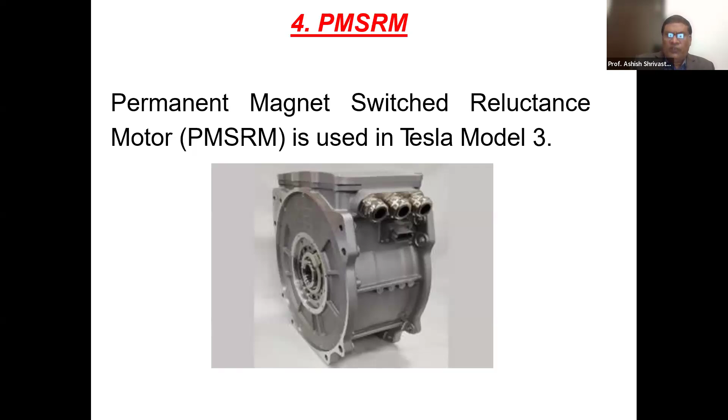This is the permanent magnet switched reluctance motor, PMSRM, used in the Tesla Model 3. This is a very unique kind of motor which works on the reluctance concept, and this is being used by Tesla 3. They are also planning to develop their manufacturing plant in Bangalore, India as well. The fifth one has not entered manufacturing or utilization in electric vehicles to date, but at the research level you can find so many papers based on the synchronous reluctance motor as well.

What are the challenges faced by the EV industry in India? Well, there are so many, but we will discuss a few.

First is charging infrastructure. The government is not developing enough charging infrastructure, whether it's level 2 or level 3. That means they have to take the initiative to set up more community charging stations, so that people will come forward to purchase electric vehicles.

Second, you may hear so many news items that solar power charging stations and wind power charging stations will be developed at existing fuel stations by the country. But yes, this idea is still on paper only, not being executed as of date.

Secondly, mainly the charging infrastructures being developed are level 2 at the public level, which is a big challenge in India because it takes huge time, and India has so many vehicles on the road. If commercial charging stations are not developing type 3 DC charging stations, it will take a lot of time. You can't even find the availability of time for people to give their vehicle for the whole night, and then it takes 4 to 6 hours to charge. That's why more fast DC charging stations are required, which can charge your vehicle in half an hour to one hour maximum.

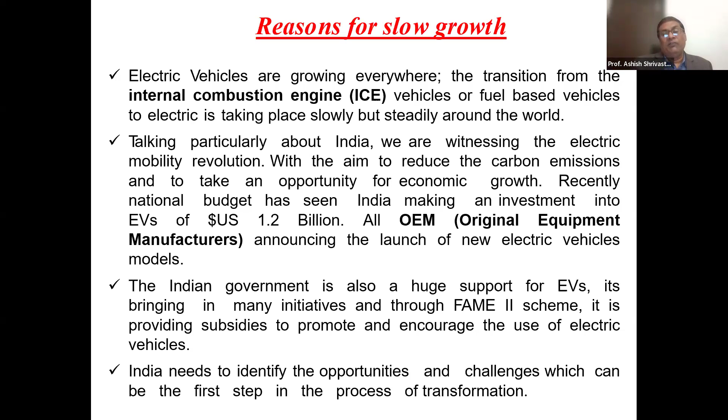But whether it is enough or not, the time will tell. India needs to identify the opportunity and challenges which can help as the first step in this particular transformation. That means people should think transforming the way, like in the light source, from bulb or CFL to LED. People have automatically transformed with understanding the advantage. Similarly, the end user, if able to understand that there are enough benefits moving from IC engine vehicle to electric vehicle, only then they will really move.

The electric vehicle sales in 2017-18, both two and four wheeler, according to SIAM and SMEV data, is less than 0.3%. So it is a very slow pace. The people are purchasing electric vehicle, though currently it has gone up to around 4%.

As per FAME 2, the EV sale target is 1.5 million by 2022. Then the share will be around 2%. By 2025, we have a share of around 4%. And the target was set, as I said, 30% electric vehicle by 2030.

India currently ranked at fourth position in automobile industry, but the sales of IC engine cars alone account around 3.4 million, between January to December 2018. That means people are still purchasing more IC engine vehicles, not electric vehicles, but rather people think of purchasing hybrid vehicles because then the engine is also there, fuel is also there, battery is also there. You would not have a situation where your battery is discharged due to any reason while on the highway, since you have support of fuel as well.

The other major reason is EV have high purchase price as compared to IC engine vehicle. Electric vehicle cost is almost 1.5 to 2.5 times of the IC engine equivalent model.

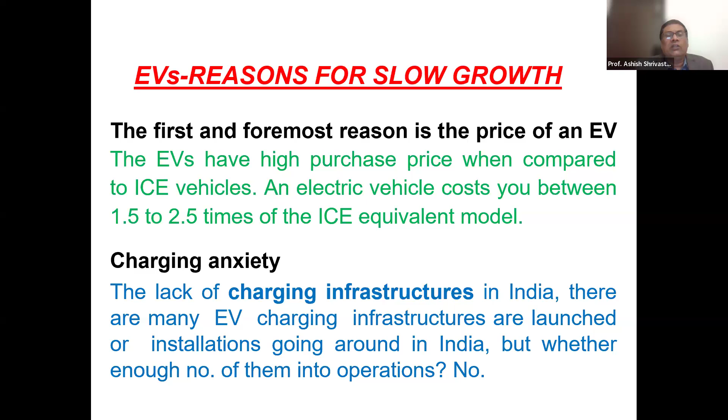Another reason is lack of charging infrastructure in India. Except for a few cities like Chennai, Bangalore, Hyderabad, you don't find enough charging infrastructure. You will find a fair number there, but otherwise, with the current population and EVs on the road, there is not enough charging infrastructure. It has not been developed all across India, so the government has to think in terms of developing more charging infrastructure.

Well, the other is no incentive provided to four-wheeler. As mentioned before, that's why the sales of IC engine cars is huge. We are expecting, as end users, more incentives should be given, which is not the case currently.

So even Niti Aayog made a proposal to transform existing IC engine based two-wheeler and three-wheeler to 100% electric vehicle. But the government has not accepted it, and even the current industries and OEMs working in this area have not accepted this concept of Niti Aayog. So to this proposal, the big and leading manufacturers such as Hero, TVS, Bajaj, Honda opposed the Niti Aayog transition decision, and they gave their own excuses that they do not have the resources or the technology to transform all their existing two-wheeler and three-wheeler IC engines and convert them into EV based.

So these are the few reasons for the slow growth of EV in India. But the three are the major reasons, you can say, which you can see.

Now, if you look at the vehicle, the design of EVs are more elegant, more good looking, only because they need to work with the concept of how much lighter weight the vehicle can be, because most of the weight is already being taken by the battery pack placed at the bottom part of the body chassis itself. So that's why they try to make it more elegant, more plastic, more fiber, so that it will be more and more lighter in weight.

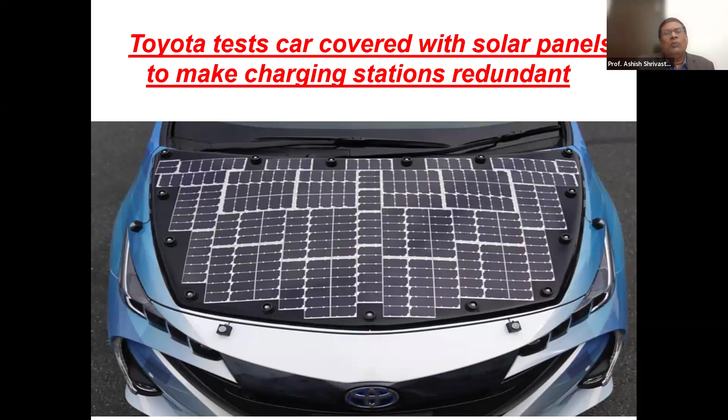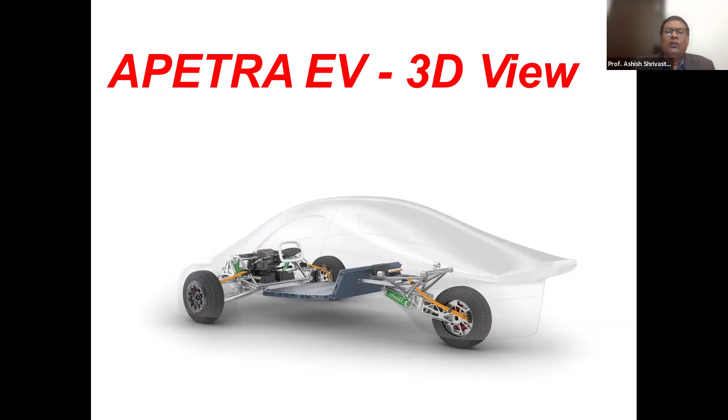Then another model, the Aptera EV 3D view. This is again a three-wheeler with a very unique design, but again it cannot give you a very high speed. It can provide mileage, but doesn't provide high speed. So people are doing a lot of invention in terms of design, look, appearance, and also mileage.

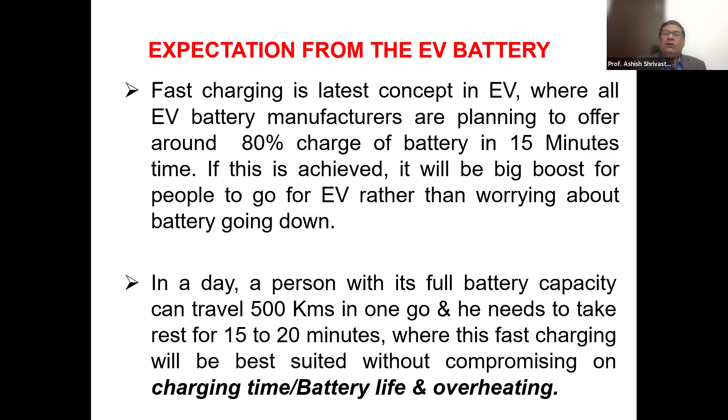Once you can give that kind of confidence in one go, and he needs to take rest for 15-20 minutes, again it will be charged. Certainly it will be a win-win situation for the end user, and they can certainly purchase and come forward to purchase electric vehicle.

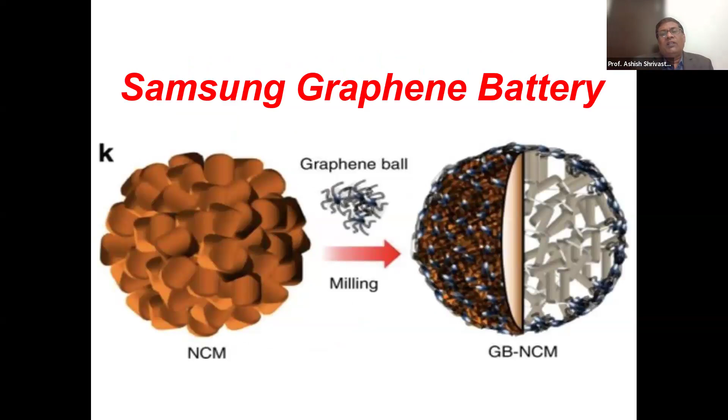Then there's another concept, the Samsung graphene battery. Graphene ball they have placed on the nickel, cobalt, manganese electrode chemical. If they put a coating of the graphene ball, then it can increase the power density and energy density. So this is also being tested.

Another benefit: if you are using a gasoline vehicle, you have carbon dioxide, nitrogen dioxide, PM levels as pollutants, this much level would be there. If you are charging with EV, it's not fully reducing this because you are charging your vehicle with grid power, and that power is being generated by thermal power plants. So because of these power stations, like NTPC thermal power stations, these pollutants will still be there in the environment.

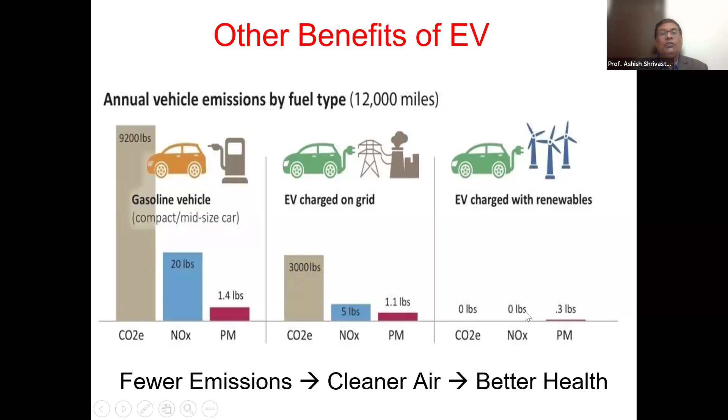But if your EV is being charged with renewable energy power, then certainly you can reduce these carbon dioxide and nitrogen dioxide PM levels. This can really help you in terms of controlling the carbon footprint.

The last question was, who are the three Nobel Prize winners in the field of chemistry for the development of the lithium-ion battery? These are the three gentlemen, and all three are of age more than 70. One is John Goodenough, at age of 97, American professor at the University of Texas in Austin. He is one of the oldest persons to receive the Nobel Prize. So a person at the age of 97 developed the battery, which is really commendable.

Mr. Stanley Whittingham is another gentleman, age 77, a British-American professor of chemistry at Binghamton University, USA. He has also contributed to the development of the lithium-ion battery. And the third is the Japanese professor Akira Yoshino, from Meijo University, Nagoya, and fellow of Asahi Kasei Corporation, a chemical company in Japan. These three gentlemen were awarded the Nobel Prize in 2019 for the lithium-ion battery.